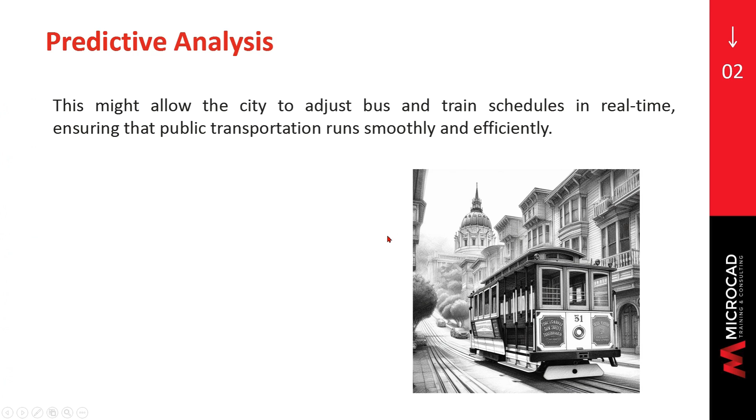Here's an example. They talk about how it would allow the city to adjust their bus and train schedules in real time. So if they find that a whole bunch of people are coming in because the Dodgers are going to be in town against the Giants, then they can adjust their BART schedules accordingly. And that's supposed to be a picture of BART there, but as you see, it's not.

So predictive analysis again here, they're saying that if you can predict this crush is coming, that lets you send more trains, alleviating or eliminating the possibility of the crush. You send the trains, you take care of it, and the problem never actually arises.

Now we talk about automated condition assessment. This is getting into where the AI can read directly from your sensors that you have out in the field. For example, this text talks about PaVision Automated Pavement Condition Assessment System. It uses a combination of cameras, GPS, LiDAR sensors - I'm not sure how the accelerometers would be used - and accelerometers. And so this gives cities, counties, whoever owns pavement, the ability to see problems as they're developing, before they have fully developed and caused conditions where the road is no longer useful, etc.

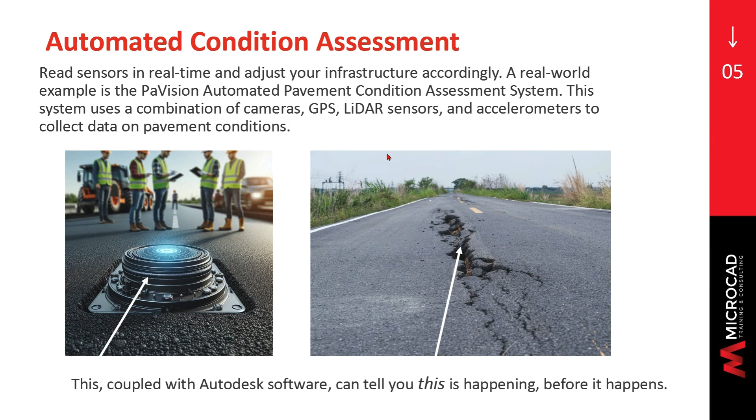And this all ties in with the Autodesk software. Okay, so I go here.

Then we want to talk about machine learning deluge. This is the AI that has been put into InfoDrainage software, which is Autodesk's drainage design software, now part of their water systems, replacing some of the previous software they had, like Sewer and Storm and Sanitary - that's what it was called, the old software.

So anyway, what this does is it collects data, and this can come from monitoring sensors that you have in your system. It can also include your historical rainfall data, topo maps, soil composition data, and then it uses this as well as terrain to do flood prediction. As part of that, it does design optimization. As long as you have accurate flood maps, then you can use InfoWorks

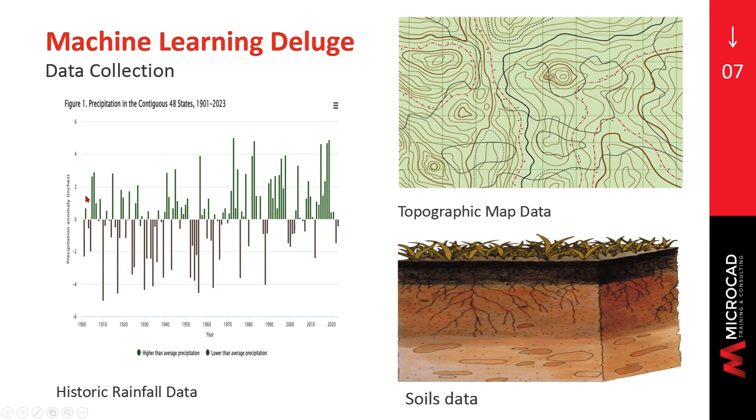and InfoDrainage for data collection. You have topo map data, soils data, and this is supposed to be representative of historical rainfall data. So it uses these data, and then it can figure where flooding's going to happen, where's the deepest water, where's the river going to exceed the banks, etc. And of course, it can give reports, lots and lots of reports.

One of the biggest things about the machine learning deluge tool: you've probably done simulations with water software before, and those can take dozens of minutes up to hours, overnight sort of stuff. The machine learning deluge tool uses AI to gather your data and other historical data into the equivalent of a large language model. It's not a true one-to-one comparison to actual language models, but it's similar, in that it gathers this data and can reapply your changes basically instantly instead of waiting for another simulation to run.

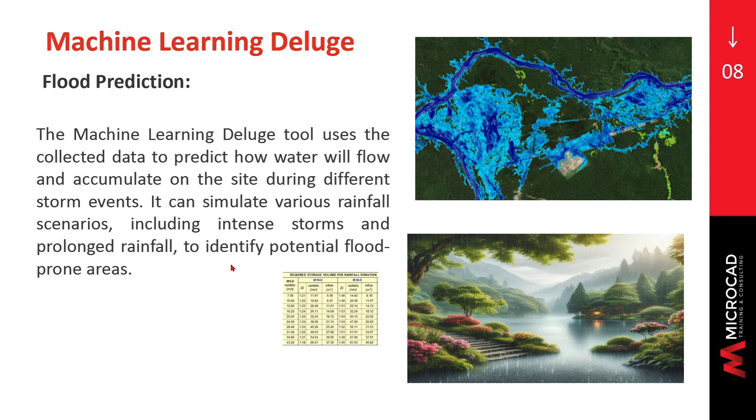That's part of InfoDrainage. Here's an example: they talk about being able to see where water is coming from into our drainage, and then help determine where to put things like retention basins and swales. This is an example of a rain garden, which is green infrastructure. InfoDrainage fully supports green infrastructure.

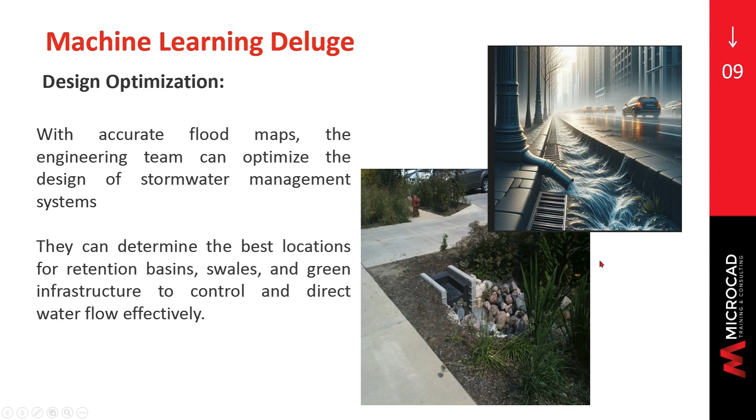So instead of doing hard engineering where you try to put everything through pavement, this uses green structure. It will do rain gardens, retention ponds, filtration trenches, and many other types of green infrastructure.

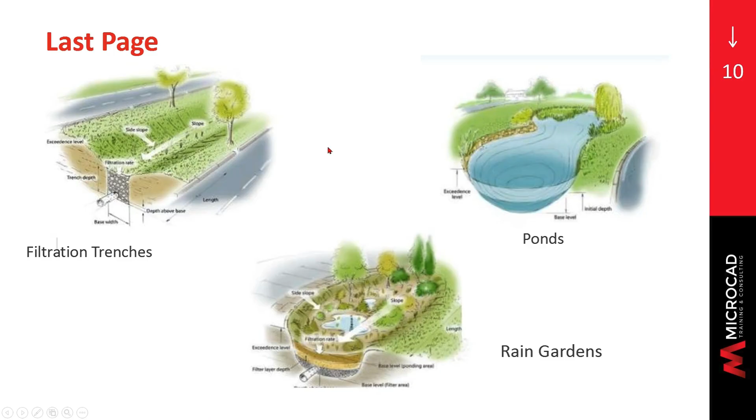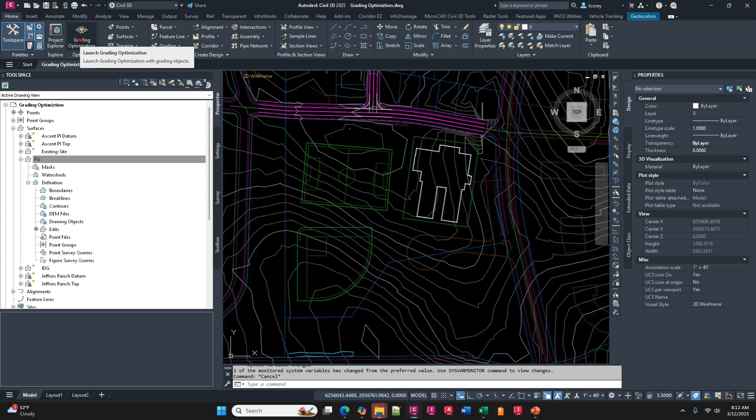I want to show some AutoCAD Civil 3D grading optimization, since we're talking about AI in Autodesk and drainage-related design of sites. On your home tab, in modern versions of Civil 3D, the most modern releases, 25 and 24, when you install the software it automatically has grading optimization installed. It's not a separate tool you get from Autodesk.com. So if I go to Home, on the far left end is grading optimization, and what you do is add grading objects.

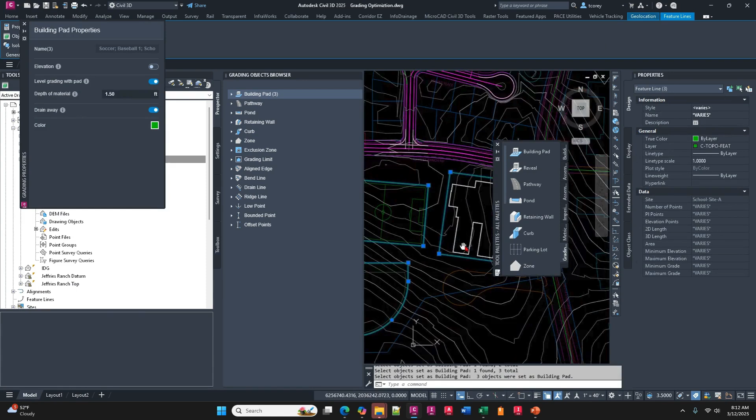I'm going to add a building pad here, come out like this, and pretend this is a building. So I pick that feature line, and we'll do each of these. You can add ponds, retaining walls, curbs, etc.

The grading optimization uses its AI to optimize the site for you based on your goals, like whether you're looking for an earthwork balance or a certain amount to go out of the site. I'm going to go ahead and just leave it like this.

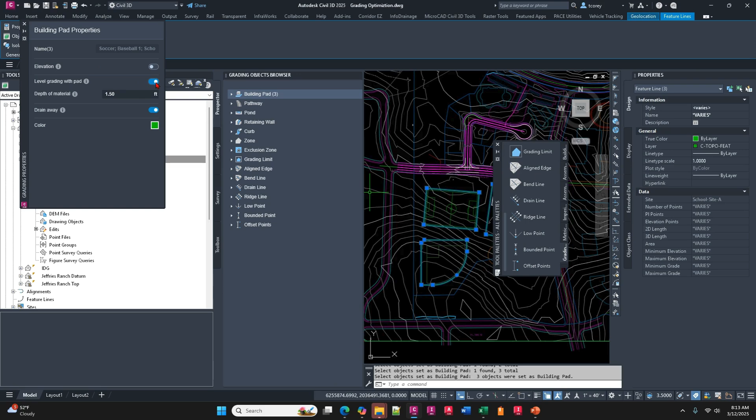Now let's look at our building pad properties. Let's give a depth—yeah, that looks good. Drain away, good. We'll just take the defaults here. Soccer, baseball, and school—it got the names from the feature lines.

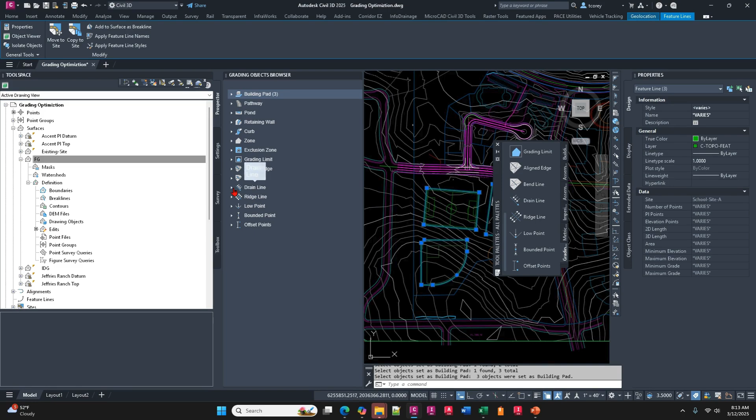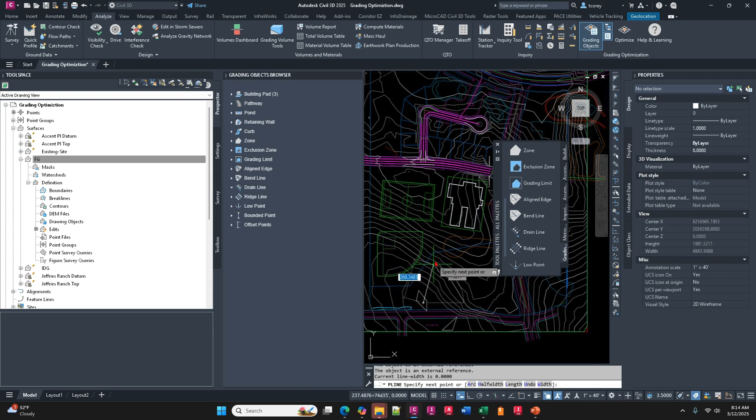Once I've placed that, I've probably placed some drainage swales. I got to place the polyline, sorry about that. See, I decide I want drainage running down like this. When I do the drain line—is it a break line? Sure, what color is it?

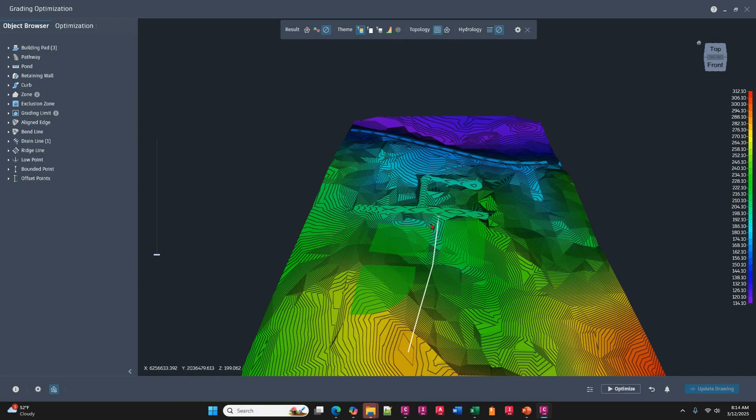White's fine. Okay, so let's go ahead and have it optimize. Pick your original ground surface—okay, this one is a combination of the original ground as well as the existing road.

Okay, so I want to check my preferences. This is your mesh quality—faster, medium, slower. Okay, that all looks good.

Turn on the visualization toolbar, so this will show results in what you're seeing here. When I'm ready to go, I go down here and check the options.

Okay, what's my minimum drain slope? It's going to be 2%—let's do 1%. And maximum drain slope, let's see if we can get by with 10. Any cut and fill constraints? No.

This iteration is how many times the AI looks through the data and tries to iterate it a little bit more, fixing it towards our goals.

This is where you can set the weighting for cut and balance or minimize total earth moved. Cut and balance is one thing, but if I have to move a million yards from one side of the job to the other and I balanced, well, that's a disadvantage, right? So you can set this.

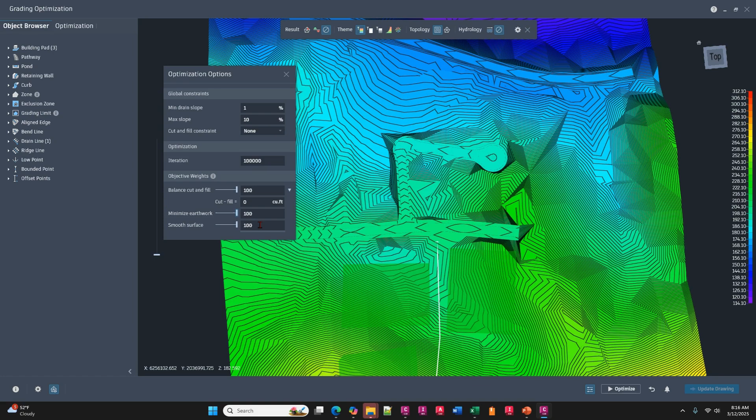Trying to get them both at 100. Smooth the surface so that it doesn't have jagged edges. Let's go ahead and leave all that on. All right, okay, so we're ready to go.

You say optimize, and it's kind of cool because you can watch it go. You can see all the areas where the drain slopes aren't good enough, and it's trying to make them better, of course. So it goes through.

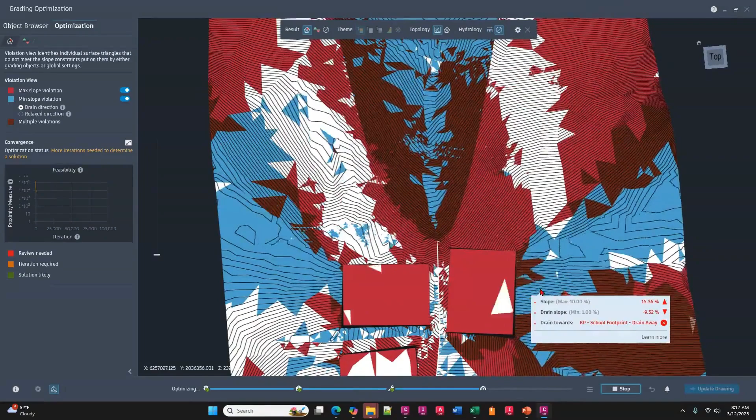It's trying to use our rules that we gave it. And you can see it's adjusting all the triangles from that original ground surface that we provided. Now, if you don't like how long something's taking, you want to change it, etc., you can always just stop. Or you can just let them run and go have lunch, etc.

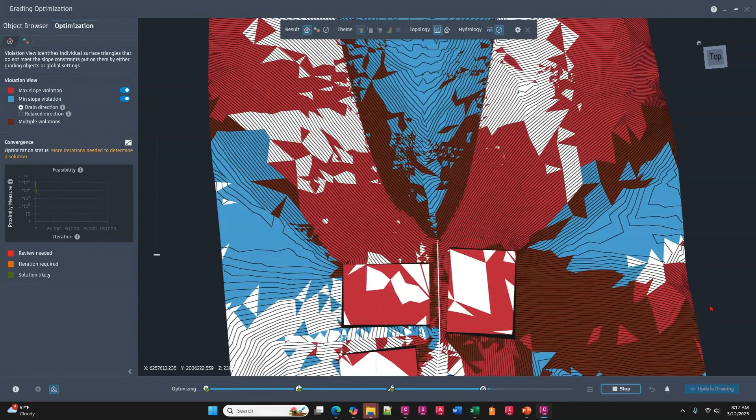But let's say I decided, yeah, this is looking good. That's great. I'm going to do a stop. Okay, and you can see how it was figuring, it's doing a chart. Once it starts flattening out, it's getting better. You can see it's starting to get some white spaces in here for me. Okay.

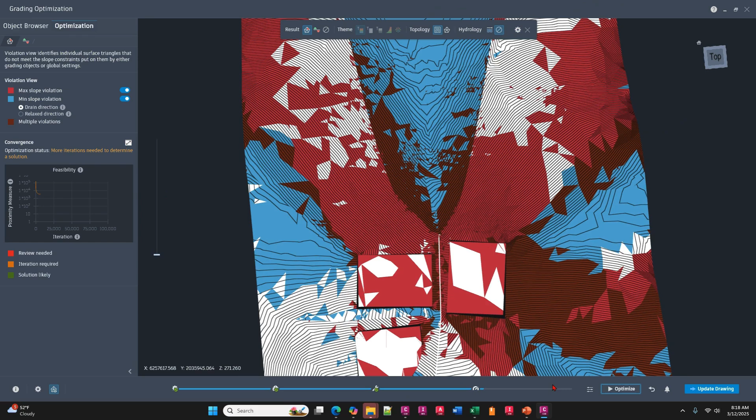So let's say I'm ready to go. I like this. What I do is just press update drawing. What do I want to send back? The surface, yeah. What do I want to call that? I'm going to call it from GO, GO standing for grading optimization, which is a lot of typing. Okay, what style do I want to apply? That's cool. Do I want the feature lines?

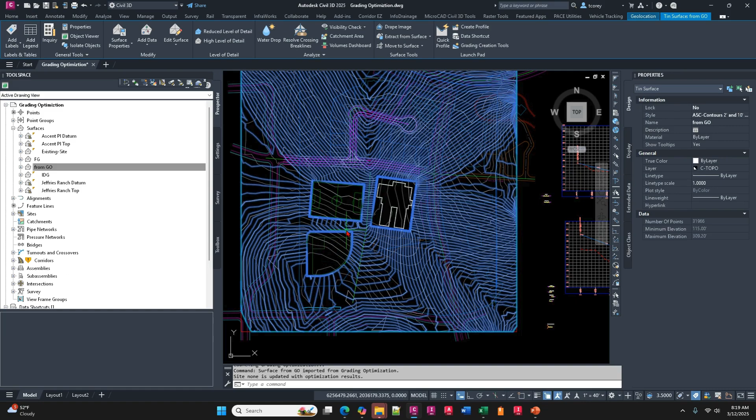I don't have any points, so, and what layer? Not going to worry about that. And finish, and it goes through and it brings that surface in. I get rid of the browser now and this one. And in my Prospector here under surfaces, I have that from GO. So let me select that. See, and you can see how it has built around and tried to fill in these areas.

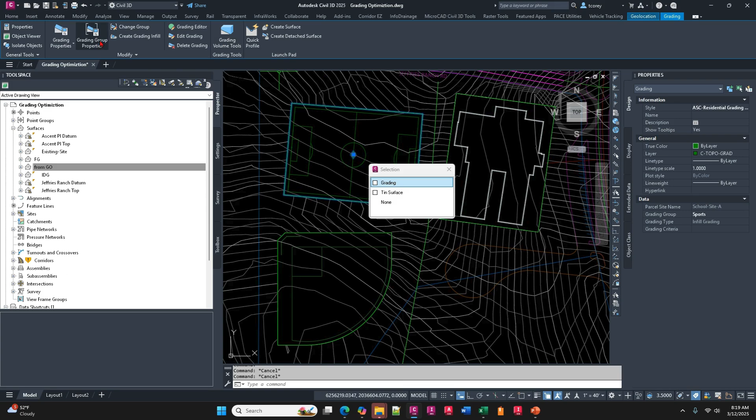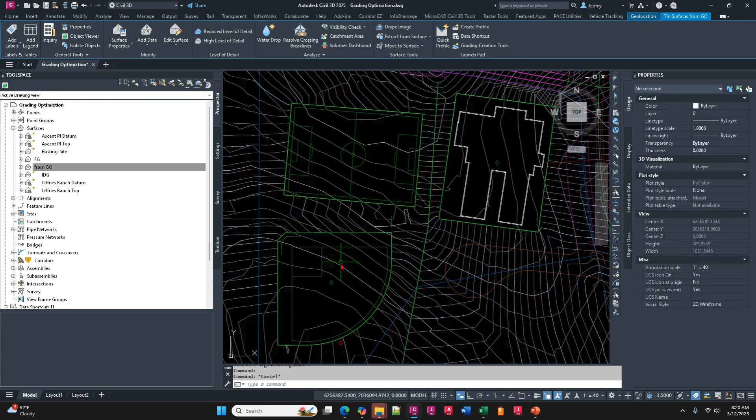Okay, I would need to add some infills in here, I think. That's not an infill. Grading. Yep. That's fine, whichever. Okay, now I don't know if I got that one perfectly good there. That's the original ground. I'm going to turn that off.

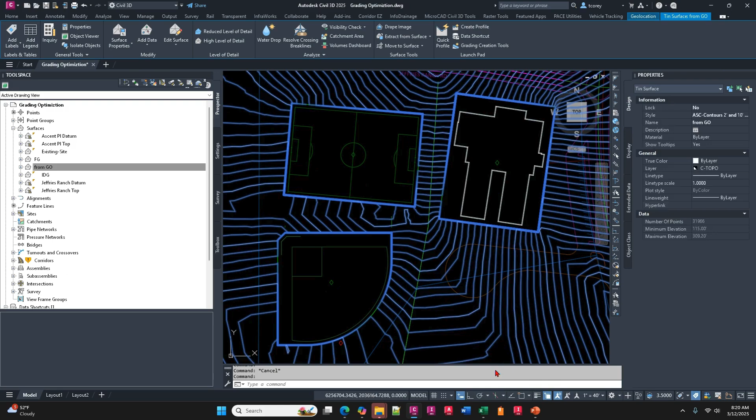Well, those are flat, so they shouldn't have contours going through them. Let me make sure, okay, yeah, so we're picking up elevations, but those are all flat, so they wouldn't have contours. So we'll look in here. Look, it's made us a little site. We didn't let it iterate all the way. Could have adjusted some of the slopes, etc. But you see it has built those pads for us in this site.

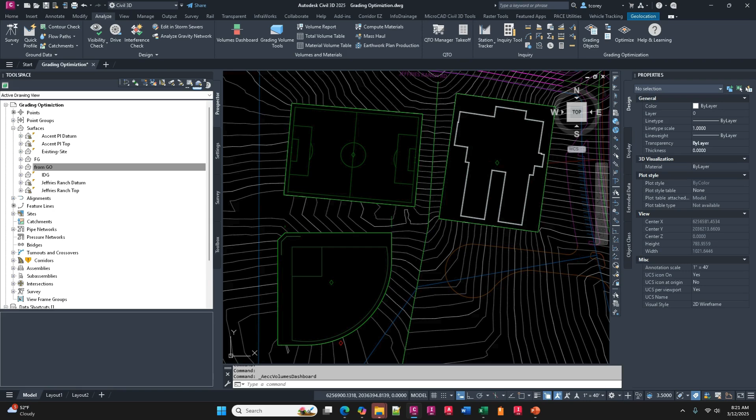And of course, if you wanted earthwork quantities now, that's as easy as going Analyze, Volumes Dashboard, pull the Volumes Dashboard to this screen, make a new entry, compare existing with from grading optimization. And that's ended up with about 25,000 yards of fill.

But it did nearly 1 million yards of cut and nearly 1 million yards of fill. So 25,000 out of that is not bad.